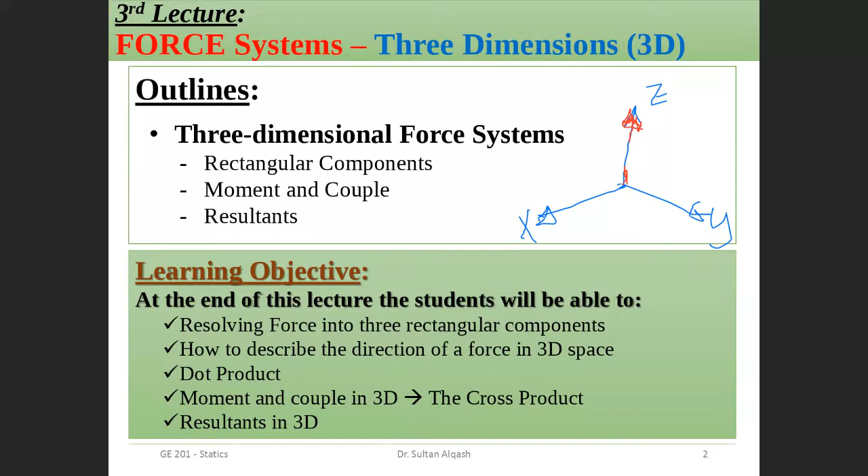And we need to learn about the dot product in case of 3-dimensional and the importance of that. Then we need to do the moment and couple in the 3-dimensional scenario, where we'll learn about the cross product, and finally the resultants in the 3-dimensional space.

So basically, you remember that to do the rectangular component in 2D, we were only writing one for the X component and one for the Y component. This is for the 2D. And then adding this one, so now this is the third component in the third dimension. So this is only adding this one.

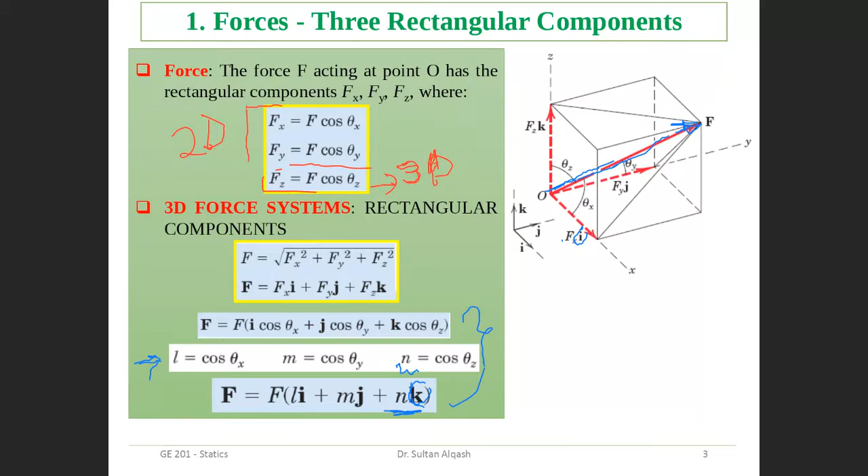And if you also use the direction cosines, you can write it also in L, M, and N, as we learned in 2D. But what we need to do now, instead of just L and M, we add one more, N, for the z-axis, and the unit vector in the z-axis is K, small letter k. That's it. And this is the resultant, which is just the summation of the components of the main vector along the 3 axes. Simple, right? Nothing new, only adding the third dimension.

And here is one more explanation to write in. So we know how you write it in terms of the cosine vector.

In solving 3-dimensional problems, one must usually find the XYZ scalar components of a force, as we saw in the previous slide. In most cases, the direction of a force is described by 2 points on the line of action of the force, or by 2 angles which orient the line of action. This is really important, so pay attention, and more explanation follows in the next slides.

Clear? So now, how do we describe the direction of a force in 3D space? We use something called the dot or scalar product to define the direction of a force in three dimensions.

The dot product is nothing but the magnitude of P times Q times the cosine of alpha, the angle between them, as you can see in this picture. So this is P and Q, and this is alpha. This means the dot product is the projection of a vector on another vector. So the dot product of any two vectors P and Q is a scalar quantity.

So now Fx is F cosine theta sub x, along the x-axis, and Fy is F cosine theta sub y, as we explained on the first slide. Or we can say this using unit vectors: F dot i, F dot j, and F dot k.

A more detailed explanation: n, the unit vector, is a unit vector in a specified direction. The projection of F in the n direction has magnitude Fn, which is nothing but the vector dotted with the unit vector n, and then the vector quantity is F dot n, times n, meaning F dot n times n.

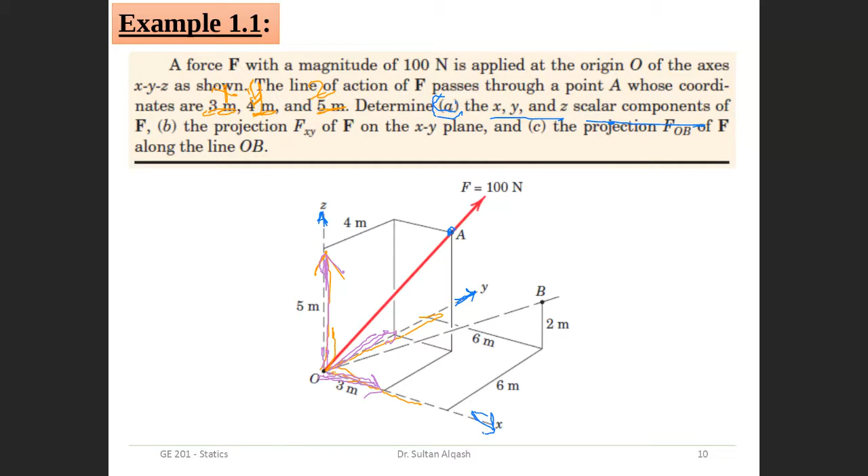So you have different ways, right? The book gave you a way to find this one, and you might solve it your own way if you can't find, for example, the angle. Remember we mentioned we have two different ways: either by the two angles, or by knowing the 2 points along the line.

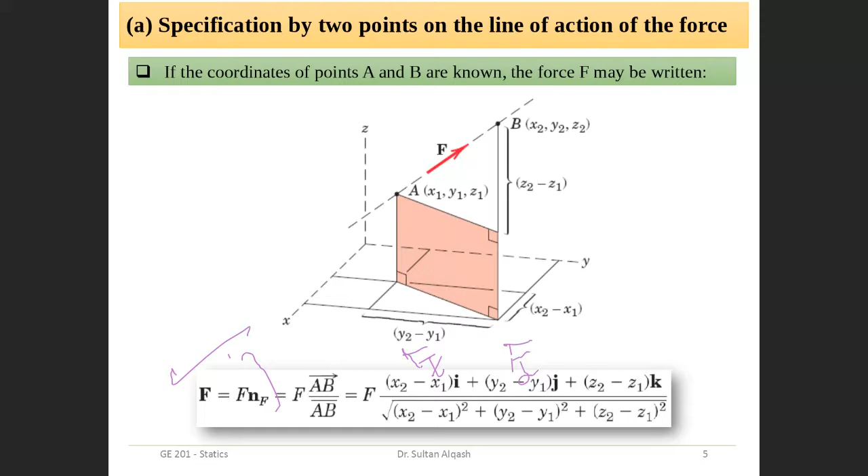So since we know the point, we need to use this equation. He gave point A, so we know the line from O to A, so we can use this equation and find the answer. By finding the result, I can find i, j, k - I can know the f along the x-axis, the scalar component along the y-axis, and the scalar component along the z-axis. Simple, right? Clear, guys?

It's this one. He used that equation because we know he gave us the point along the line of action of this force, from O to A. So I can use this equation. I know the unit, I know the magnitude of F, which is 100 Newton.

So we have three values multiplied by 3 unit vectors, i, j, k. i is for the x-axis, the magnitude corresponding to the x-axis, and this is for y, and this is for z. Clear, guys? I hope this point is clear.

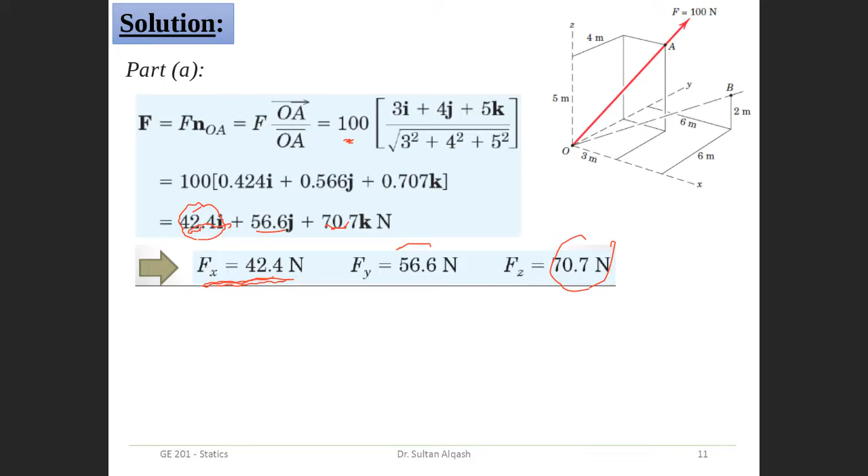Second requirement: back to the question, it asks you to find the projection of F, Fxy, along the xy plane. So this is the plane being talked about. We need to define the plane - so this is the plane, here it asks you this one, so here it is the xy plane. Clear?

It asks you to find the projection along this plane. How can you find it? We know we need to use the advantage of the dot product, where we can know the cosine angle between the two vectors, for example.

Which in this case, cosine theta - remember here - so cosine theta, you can find from here. Cosine theta is the vector p times the vector q divided by pq. So what does that mean?

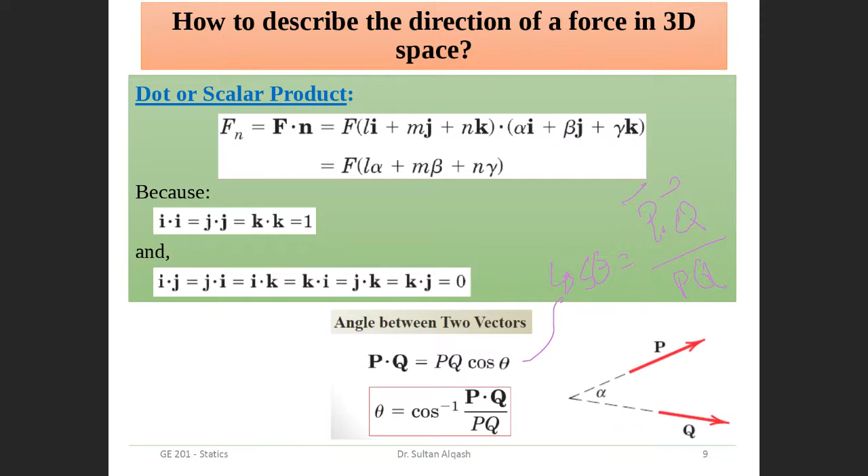So now F cosine, so plug back cosine theta xy. This will give us the projection of F along the xy plane, which is F sub xy, and the magnitude.

Okay, think about it. This is an example, it is well explained in the book. Part C.

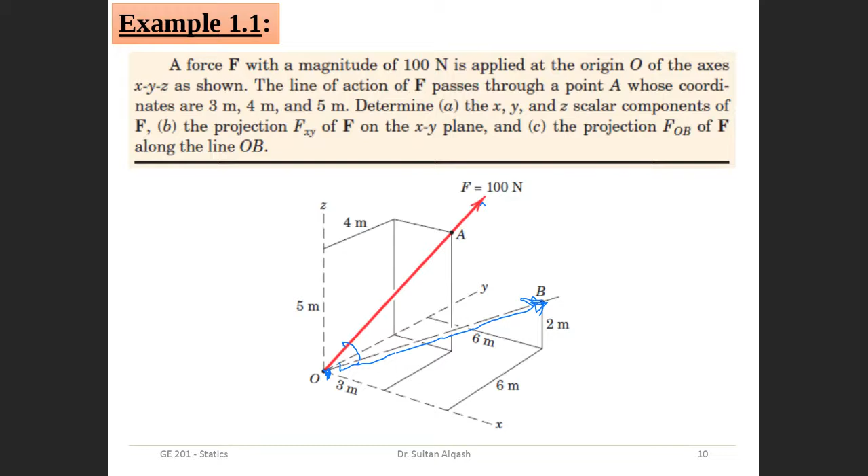We need to find theta again, and the unit vector first between them. So you find first the unit vector of OB, which is the vector OB divided by its magnitude, right?

Then we need to find the scalar projection of F on OB. After that, you can write that in terms of vector notation. Simple.

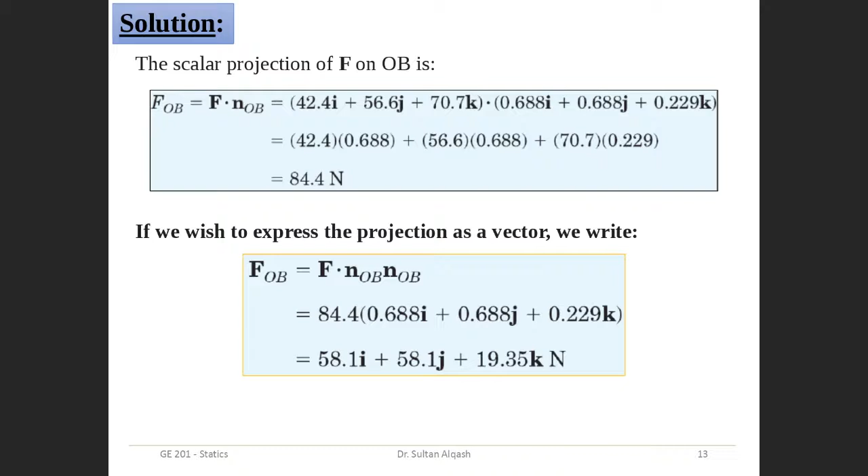Guys, it might be you find it difficult, but sit down and try to look at the problem, get the pen and paper. I told you, you have to keep pen and paper right next to you. You have to draw and see and figure out the values on the x, y axes, and try to find the unit vector and all of that. It's just an implementation. See the example in the book also, it gives you shortcuts but doesn't give you the full solution, so you need to figure out how to get these values, where the values are. Is that clear, guys? You must use pen and paper in practice. Get back to the book, find this example in the book and read it and try to understand it.

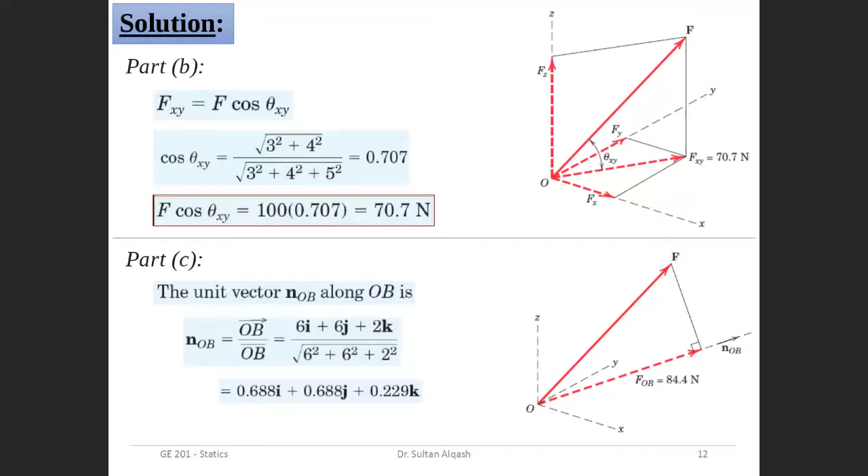Okay, so now let's go to the next topic, which is moment in 3 dimensions. Simple, exactly as in 2 dimensions. We said that the distance should be perpendicular to the force vector, that will give us a moment. If you use the right hand rule, the thumb will point to the direction of that moment.

And the rest of the fingers give us the direction of the moment. So the moment due to F along point O is the rotation around this axis. This is also a cross product, because the cross product of two vectors gives us a vector. We said that R cross F is equal to this, R times the sine of the angle between them, which is alpha, between F and R here.

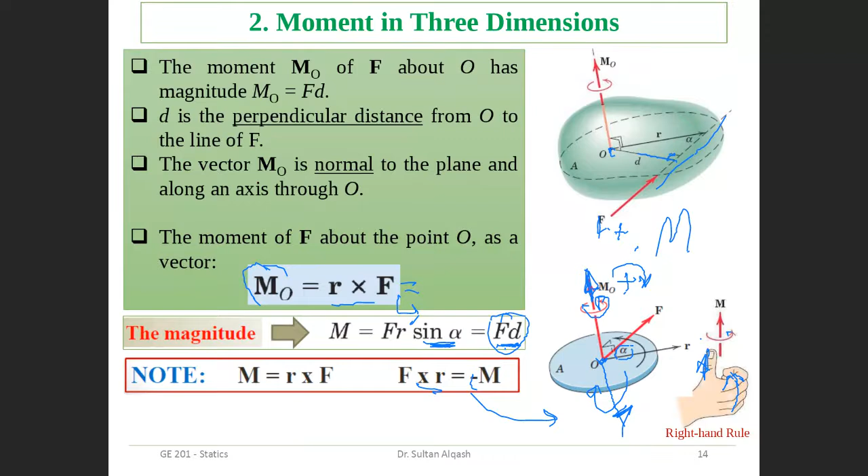Here more explanation of what cross product means. We could explain it by two fingers and one thumb, where one finger is for vector B and one finger is for vector A, and the resultant of this cross product is along the thumb. So it's similar to the right hand rule, right? As explained, one gives positive, one gives negative, depending on either A cross B or B cross A.

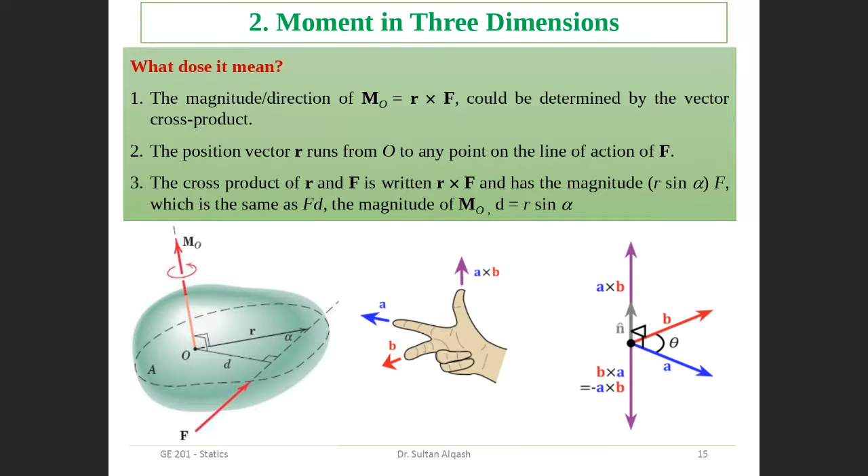Here is more explanation for cross product, where we can find the determinant. So I, J, K, if I have Rx, Ry, Rz, which is the unit vector, the magnitude along this unit vector, and Fx, Fy, Fz. If you open this determinant, you're going to find this. Just remember how you find the cross product using the determinant. You will reach Mx, My, Mz, which is the scalar of M along X, along Y, and along Z.

If you look to this explanation, it explains this figure: if you want to know the rotation along the x, y and z axis for this vector, for example F, all you need to do is find the components Fx, Fy, and then find the perpendicular distance along each of these axes, or right away use the cross product.

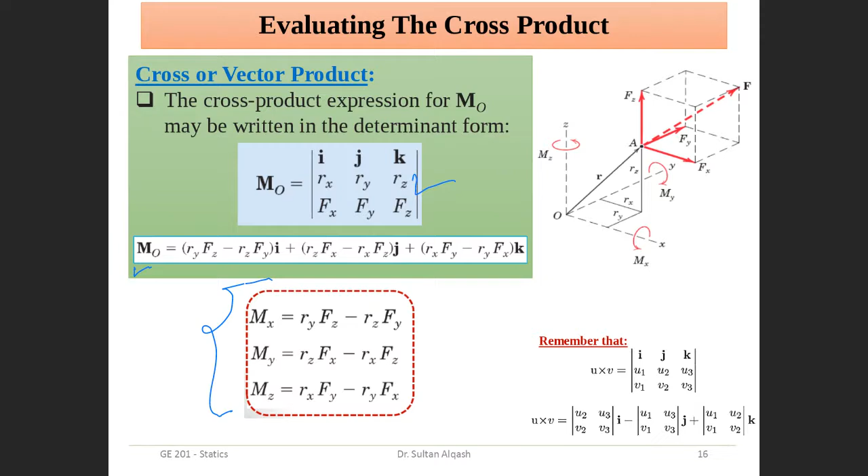So this is one method using the cross product. R has Rx, Ry, Rz, and F has Fx, Fy, Fz. If you do the cross product using the determinant, you will reach this result, and this is what it means. This is one way. So this is the beauty of statics - you have different ways to find the answers.

Here's another way, or more explanation, for the cross product, where you know this is sine alpha. So if you have a cross product, it is the sine alpha, where sine 90 in this case equals 1. So I cross J, which is 90 degrees between them, is equal to K. What does that mean? The cross product of the two gives us the vector along K, and vice versa.

So J cross K gives us the unit vector along the third direction, and so on. K cross I gives J, J cross I is opposite so negative, K cross J is negative I, and I cross K is negative J. And if you cross I cross I, cosine zero, sine zero is zero, and sine 90 is 1.

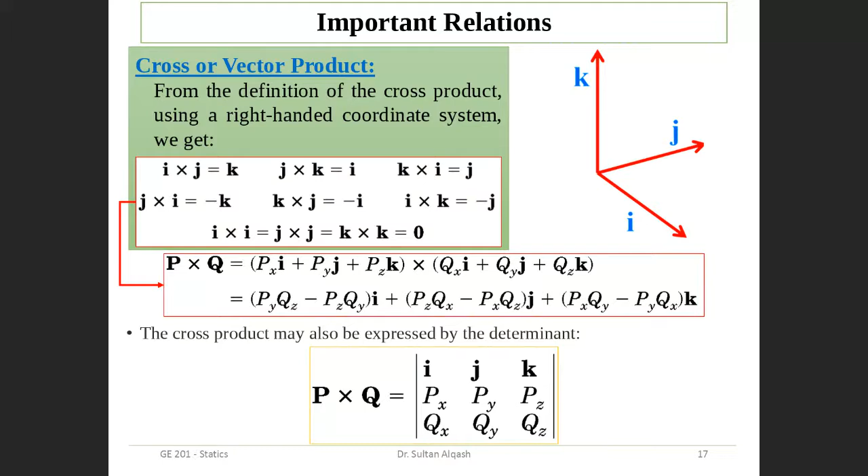So let's go back to page 17. And if you follow and lay out the cross product, you find this one.

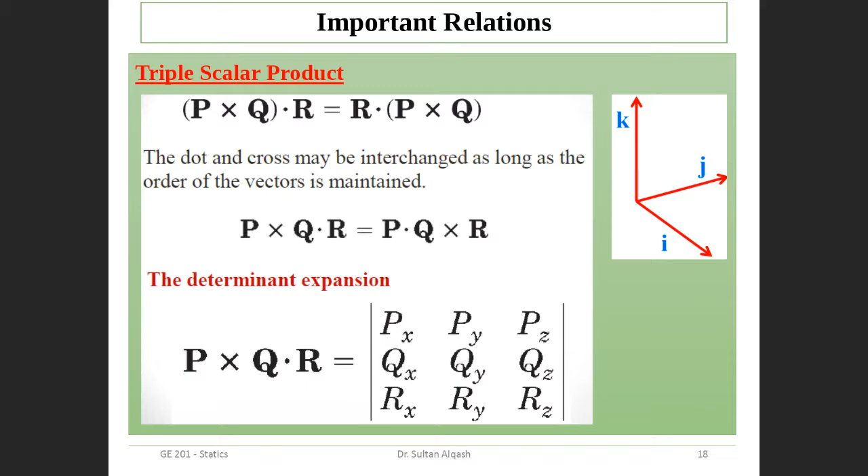So we need to use this in terms of Cartesian coordinates and find the vectors. It's really important, and you have studied that in physics and math. It's a determinant, as we said in the previous slide.

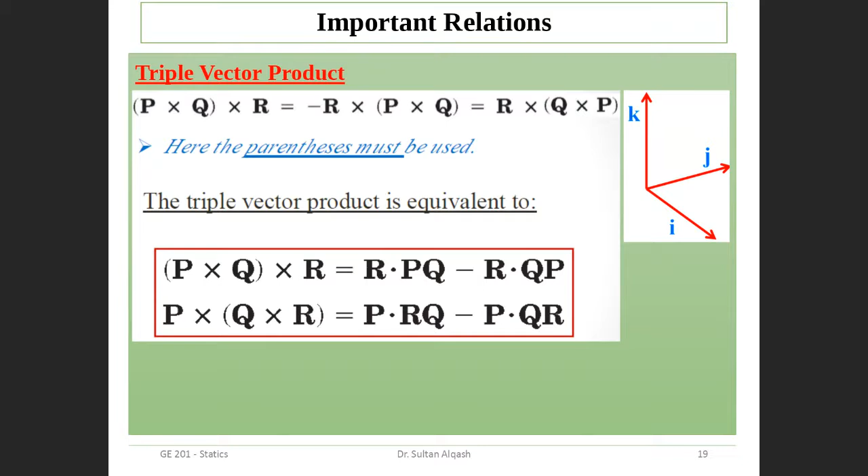The triple vector product: we have three vectors and cross product them, and here are the conditions. The parentheses must be used, because the cross product gives us a vector, which means it could be either positive or negative. So we have to be careful about the parentheses.

Guys, are you with me? Hello? Okay, let me continue if you do not have questions.

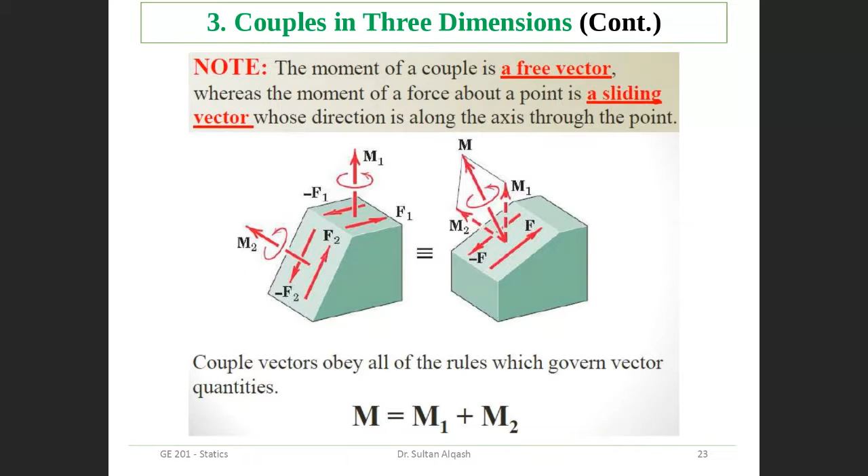Here is more explanation: the moment of a couple is a free vector, so we have a free vector, whereas the moment of a force about a point is a sliding vector, whose direction is along the axis through the point. So we have to go back and review - I explained in detail the difference between free vector, sliding vector, and fixed vector. You have to go back and understand what I explained previously.

Here it is the couples. Again, the last point about the couples, and then we go to the example.

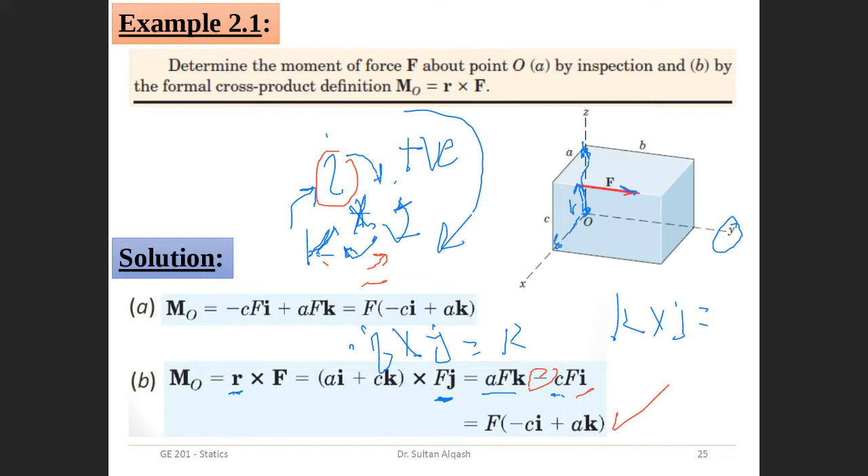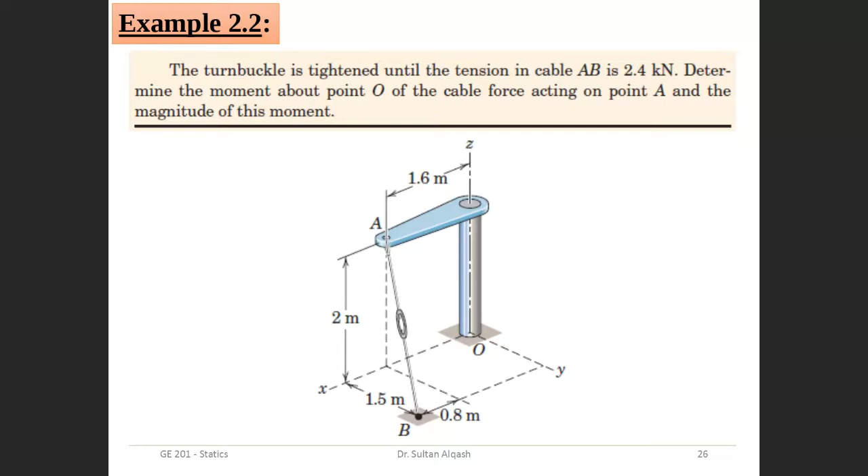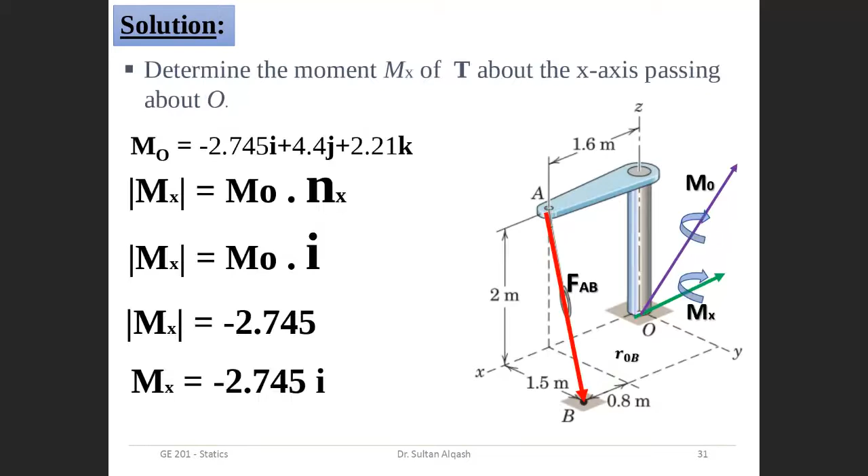Here's an example, I will leave it to you. Read it, it's really important. Read it on the weekend. It is now for you, the solution is there. Read it, try to understand it, it's a well detailed solution. We don't have much time to discuss it in detail.

Finally, the resultant, as we did in 2D. Here we just have one more dimension. Simple, it's exactly the same. And the moment, you can find the moment.

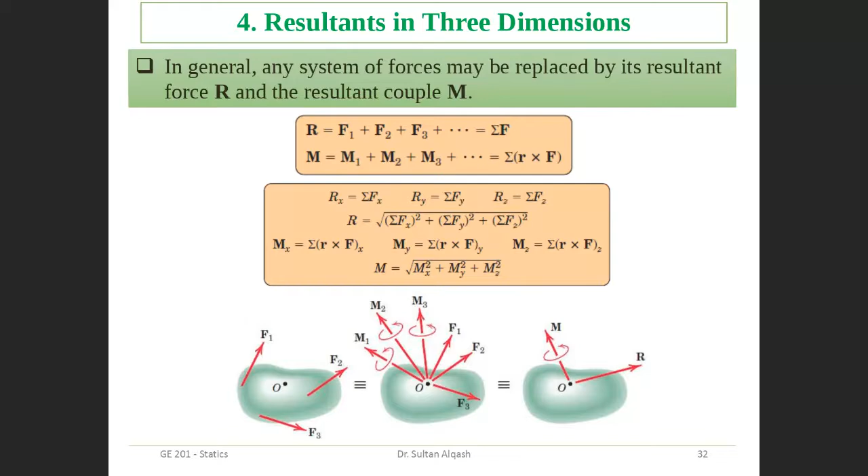It's simple guys, just adding one more direction, so I don't want to spend too much time explaining it. The resultant is just the components along all the axes. Then we have concurrent force, where all forces act at one point. Then parallel force, you know that. And coplanar forces, in the same plane - I explained that in the second lecture.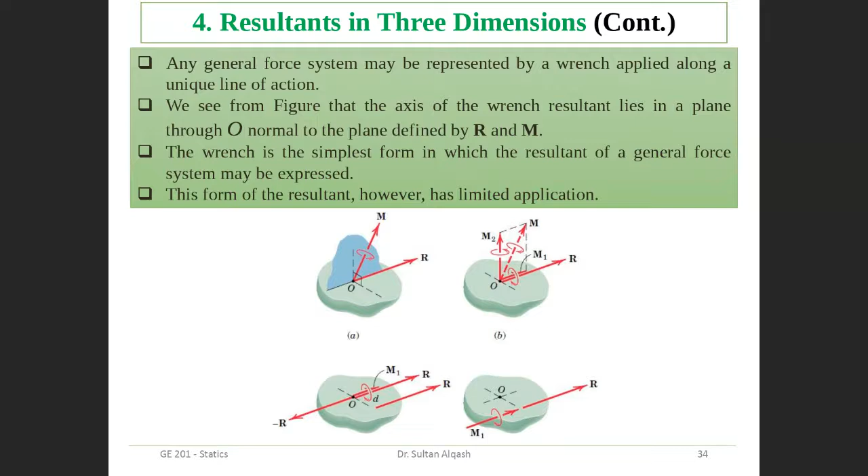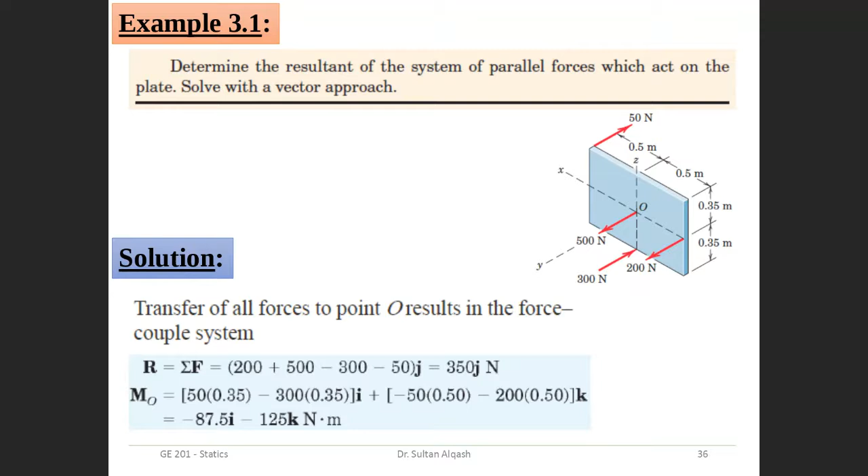Here are different problems or examples for defining the resultant in 3D. Next week, inshallah, we're going to solve a couple of problems. Here's a simple, straightforward problem to find the resultant - it gives you the forces applying in this part. It says determine the resultant of a system of parallel forces which act on the plate, solve with a vector approach. So simple, you have parallel forces here, he asks you to find the resultant force. I'll leave it to you guys.

Any questions, guys? Just go home, look at these examples, and next week, inshallah, we'll show you a couple of problems. Also, we'll give you a couple of problems to solve at home, practice, and inshallah everything will be easy.

Just in 3D, the only difficulty you guys will find is how to imagine and analyze this carefully. Adding one more dimension makes the problem a bit complex, so we need to be careful and try to understand the dot product, cross product, and practice these things to be professional in this.